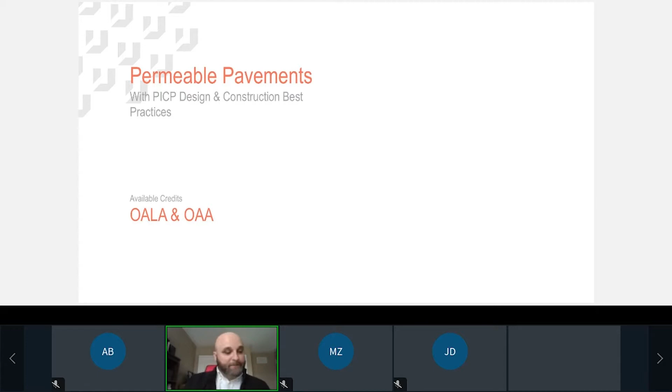So I'm going to begin with a brief history of Unilock, followed by the recorded segments with Alex. Unilock was founded by Ed Bryant 50 years ago, and the Bryant family are still the decision makers today. They continue to guide the company and make Unilock successful. 2022 marks a huge milestone for Unilock. It's our 50th anniversary. Unilock was the first manufacturer of concrete unit paving in North America.

We are a Canadian company with our first operation beginning in Barrie and have since expanded our operations to Ayr, Gormley, Pickering, and Georgetown locally. We also have US locations in Boston, Chicago, Cleveland, Detroit, Milwaukee, and New York, and we're growing.

We source local materials to manufacture our products, helping the communities that we operate in. We manufacture quality products by producing unit paving and wall blocks with precise dimensional tolerances, low absorption rates, and high compressive strength. All of our products meet but more often exceed industry standards.

Unilock is a trendsetter and drives the unit paving and retaining wall industry with new and innovative products.

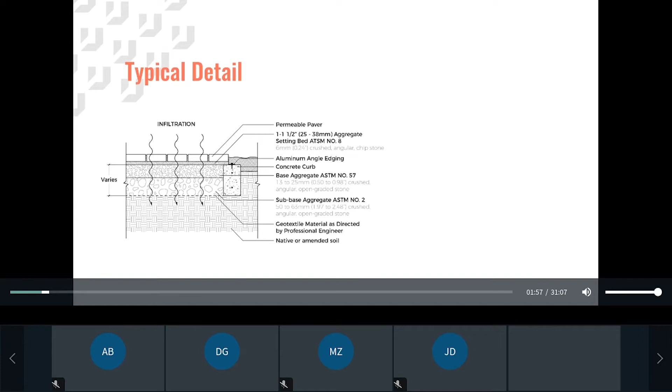In the 80s, Europe faced a series of devastating floods. The increase in sealed surfaces, in particular pavements, were found the largest contributors, triggering changes in stormwater management. Langsdorff Licensing saw a need and created the first permeable interlocking concrete paver, which allows rainwater to infiltrate through the pavement and back into the soil.

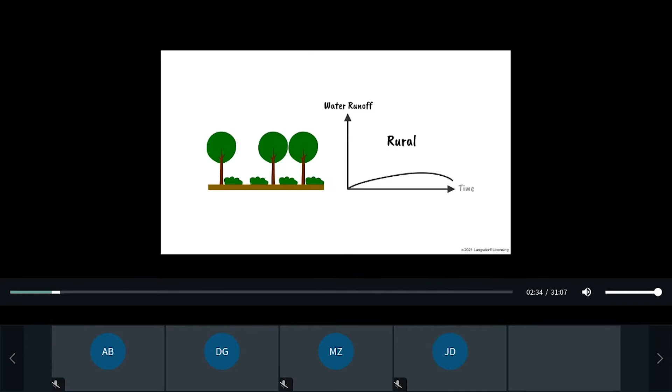Due to intensifying urbanization, water runoff is increasing and happening faster, causing more severe flooding.

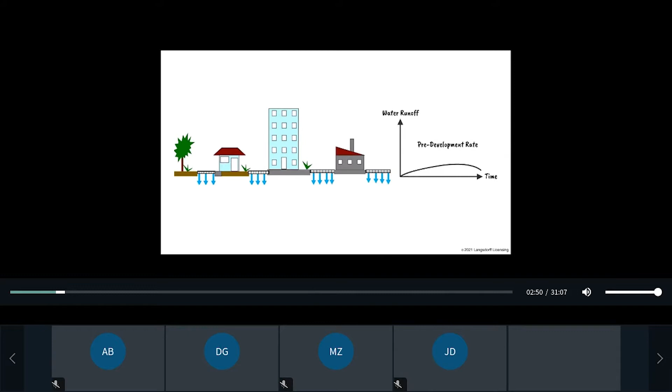Permeable interlocking concrete pavements, or PICP, help reduce runoff back to pre-development rates. After Germany, PICP systems were introduced, often mandated, in Switzerland, Austria, the rest of Europe, the UK, and all the way to Australia and Japan. The concept of utilizing permeable pavements became recognized globally. While there was early success in North America, the market here demanded more research.

Starting in the mid-90s, Drs. Ray and Miriam Rollings, Corps of Engineers, Professor Phelan, Northeastern University, Professor Zollinger, Texas A&M, Professor Shackel, University of New South Wales, Professor Hunt, NC State University, Dr. Drake, University of Toronto, and in particular, Professor James, University of Guelph, found that while offering numerous benefits, maintenance of PICPs can present challenges, especially when cleaning is delayed. Lack of cost-effective and practical approaches prevent the widespread adoption of PICP systems in North America. Novel and practical maintenance and operational methods supported by scientifically based proof are needed.

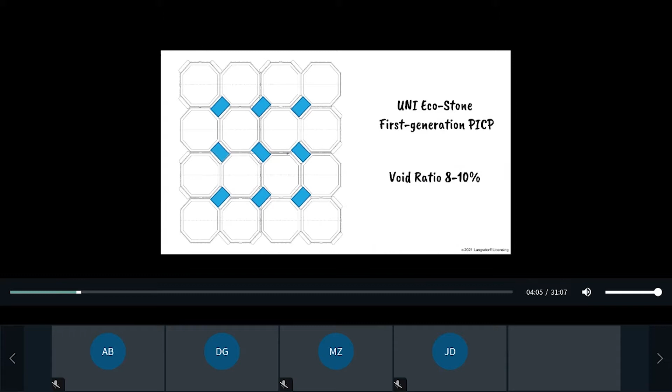The first generation permeable interlocking concrete paving stone had a void ratio of 8 to 10%. The second generation permeable interlocking concrete paving stones have a void ratio of 6 to 8%. However, clogging and maintenance are now the key concern. The drainage joints have now narrow walls, top to bottom, and over time, the top 1 inch gets obstructed with fine sediment.

The Kortright Centre permeable pavement test demonstrated that most cleaning methods show limited effect or are time-consuming and expensive. Our new product idea was to address this by changing the paving stone and its joint design. Our next generation pavers and joints are now formed so they can be easily cleaned. Please follow the link to see the simple yet effective solution to the maintenance problem.

Section 2. Case Study. Guaranteed Rate Field. Construction of the Guaranteed Rate Field parking lot was very expensive due to the required stormwater infrastructure. Alternatives to standard stormwater construction practices were being assessed, and 2 designs were developed, one using a standard stormwater infrastructure and one using permeable pavement.

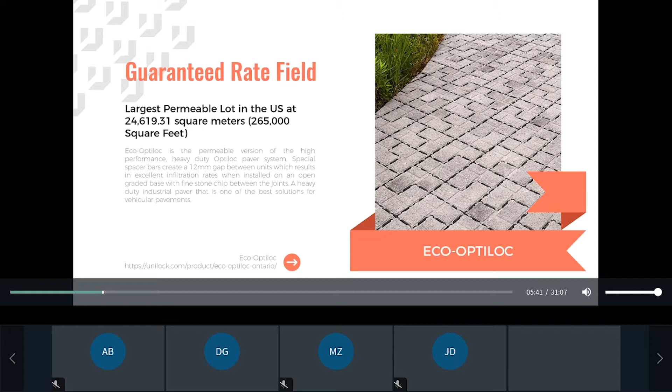Storage capacity is an important feature of permeable unit paving, and storage should be designed to accommodate an extreme rain event. For Guaranteed Rate Field, an additional 50,567 cubic feet of storage capacity was designed into the system to accommodate a larger rain event. The capacity is related to the depth of the subbase material, which in this situation was 14 inches of base aggregate with 40% void space, supplying 123,667 cubic feet of storage. For typical events, only 73,100 cubic feet of storage is used, but the system is made to accommodate an inevitable larger rain event.

The existing soil conditions on site allowed for up to 14 inches per hour of infiltration, so the parking lot did not need to be connected to the municipal stormwater services. Site soils are an important part of the success of a permeable pavement, so geotechnical engineers should be involved with the design of permeable unit paving systems.

By implementing a permeable unit paving system, no extra infrastructure in the form of 44 inlets, over 3,000 linear feet of pipe, and a storage tank was necessary. Also, by exchanging a traditional stormwater system with a permeable unit paving system, there is an approximate savings of $2 million in underground infrastructure. The resulting permeable unit paving installation had no inlets, no concrete pipe, or storage tank, which led to an approximate cost savings of 15% versus traditional rainwater mitigation methods.

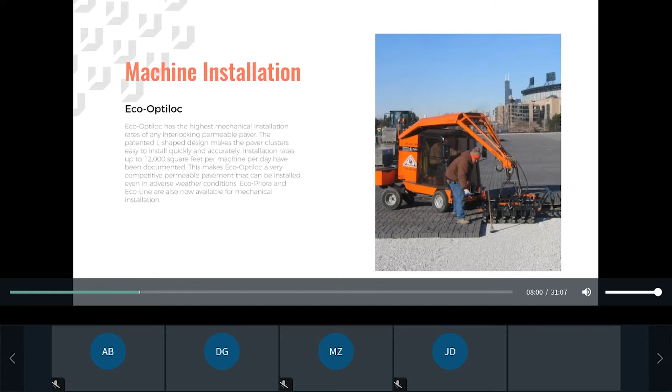Section 3, Case Study, Buckingham Fountain. Buckingham Fountain was completed in 2009 and was paved with our Eco-Priora permeable paver with a series finish. The significance of this project is the desire to maintain the appearance of the existing pavement material, but it was failing and needed to be replaced. There was also a need for permeable pavers to improve the drainage on site.

We were able to apply our series finish to our permeable unit pavers to closely match the existing color and overall appearance of the plaza space.

The same natural stone material used to create the original pavement was applied to the face of our pavers in the form of an aggregate, which we refer to as series. The site receives constant foot traffic and is often used for filming, but it maintains its look and feel. Buckingham Fountain is the largest permeable unit paving plaza in the US, and it gave rise to a series finish that has now been used on a variety of projects since.

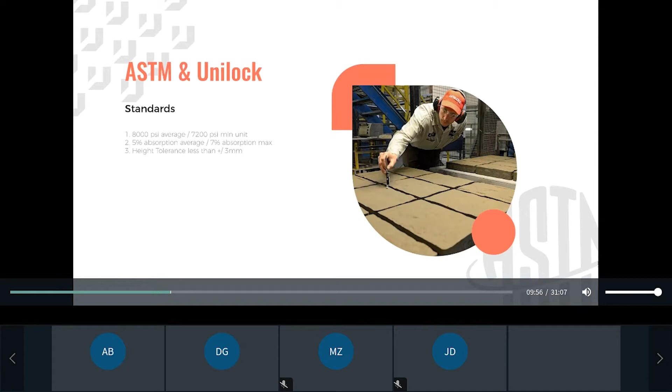Section 5, Benefits: Infiltration and Pollutants.

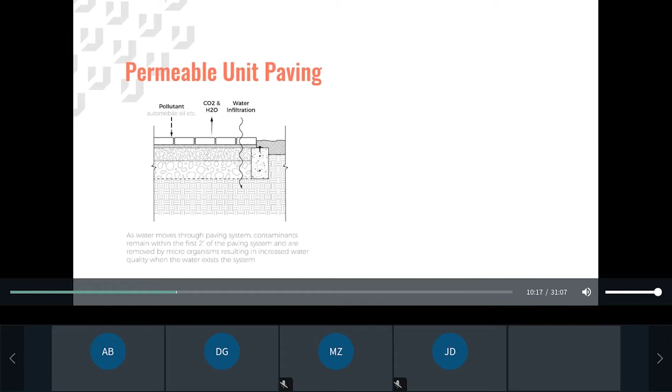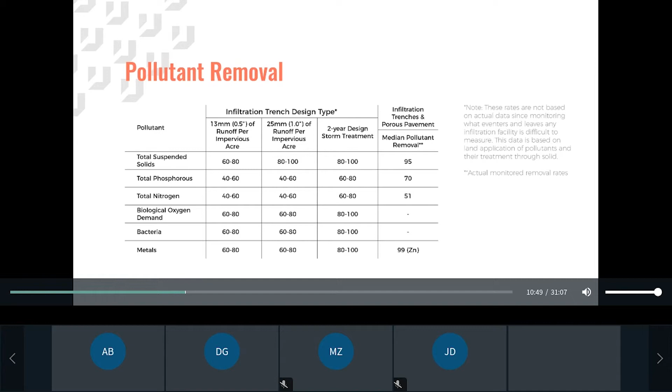Overall, permeable unit paving systems do well at removing suspended solids and phosphorus, which can cause eutrophication when leaching into natural water sources. Eutrophication is common in agricultural areas, where it creates dead zones and can be responsible for algae blooms.

Section 6, Design: Materials and Laying Patterns.

Before selecting a type of permeable unit paving, it is important to determine what you are trying to achieve. Consider what the goals of the project are. Does the site receive vehicular traffic, or is it a streetscape where wayfinding is important?

Are there environmental factors that need to be taken into consideration? Is downstream erosion an issue, and what type of rain events will the pavement need to accommodate? What local regulatory requirements exist? For example, the Toronto Green Standard requires a solar reflective index of 29 or greater. Determine the site soils, as they will influence the base depth of the system, and if water needs to be redirected to areas with higher infiltration rates. Lastly, what is the budget for the project? This can determine what finishes are available and whether immediate costs outweigh life cycle costs.

Loading conditions are very important when designing a pavement, and the vast majority of the time they can be accommodated if considered during the design phase, ideally during detailed design. When the pavement receives a load, the base and sub-base components of the unit paving system carry the majority of the load. They must maintain strength in the presence of water for pavement stability.

Aspect ratio is a relationship between the thickness of the unit paver versus its longest side. For example, our Promenade Plank paver is 100 by 300 by 100, having a thickness of 100 millimeters and a length of 300, conforming to a 3:1 aspect ratio.

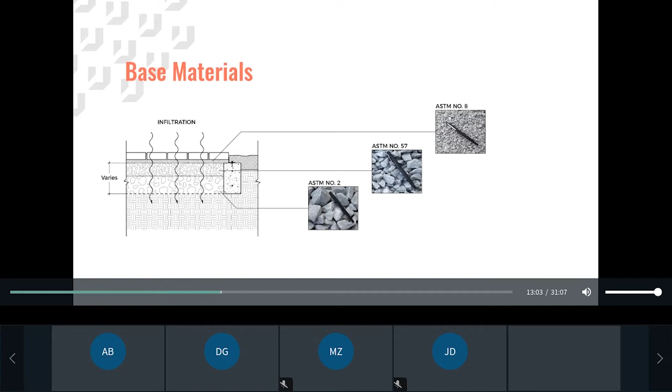These images illustrate the different sizes of various aggregates used in the construction of permeable unit paving. Take notice that these materials are all washed stone, free of fines. These tables speak to the different types of aggregates used to build a permeable unit paving system. Careful selection of base materials ensures that an installation can handle almost any amount of rainfall.

Installing a permeable paver system above porous soils allows for rainfall infiltration, reducing runoff and flooding. Most soils, even clay, allow for some infiltration. Soils with high porosity, such as sand, can have a higher infiltration rate than the actual rate of rainfall. For example, if it is raining at a rate of 2 inches (51 millimeters) per hour and the soil has an infiltration rate of 4.5 inches (114 millimeters) per hour, the soil will absorb water before it can run off.

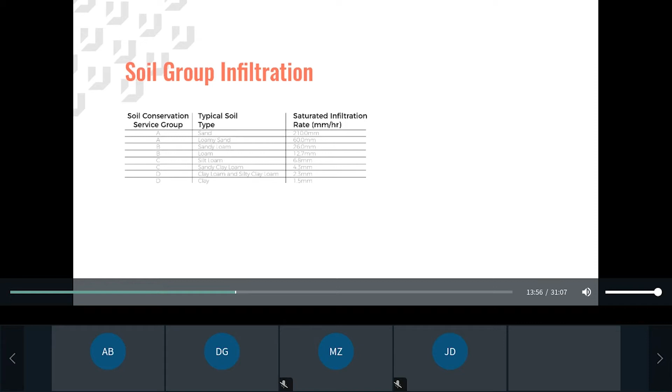Even poor soil with a low infiltration rate will work. For example, a soil with 0.25 inches or 6 millimeters per hour of infiltration will have complete infiltration after 4 hours of rainfall. Permeable paving is not a typical segmental pavement.

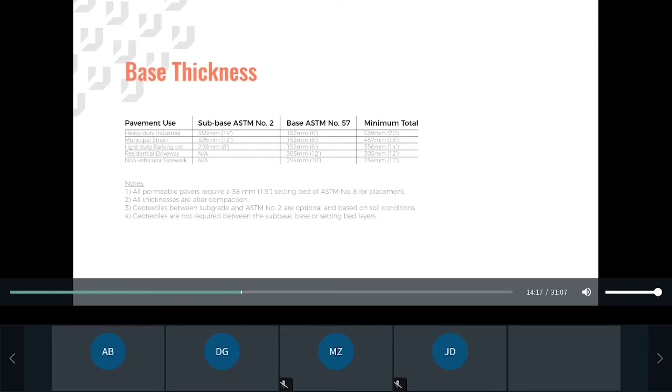Unilock recommends that a professional engineer design a site-specific plan based on available site information. Along with information provided in this presentation, Unilock offers all the data on our pavers necessary for a successful design and implementation of a permeable unit paving system.

Section 7. Maintenance, Inspection, and Practices.

Before providing maintenance on permeable paver systems, proper installation and protection during construction is required. The following are some things to keep in mind during construction: verify the correct materials are installed, hire contractors with experience installing permeable pavers, and review and approve all subbase, base, and joint aggregate materials. Do not allow installation of dense graded aggregates.

Prevent construction damage. Restrict vehicles with muddy tires from driving over newly paved surfaces. Do not mix aggregate materials. Refill joint material once between 3 and 6 months after installation, repeat as needed approximately every 5 to 10 years. Lastly, avoid stockpiling of materials on or near the permeable pavements, such as topsoil and mulch.

There are several warning signs and visual clues of common maintenance issues that must be prevented and addressed or remediated to ensure continued surface infiltration. These common problems can often be easily remedied by maintaining the proper joint aggregate level.

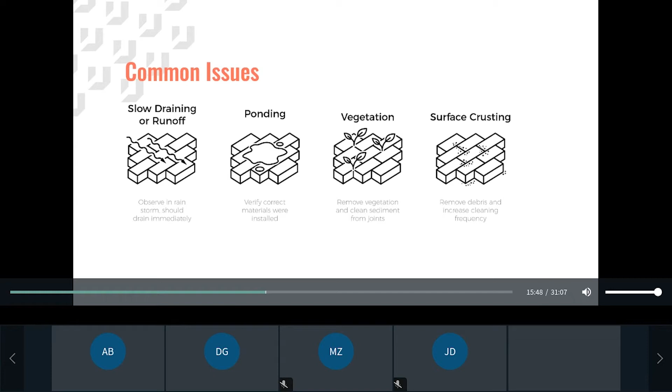Regular surface cleaning significantly reduces the chance of a system clogging, which means other more intensive treatments will likely not be required. This type of cleaning would be considered preventative, but in the event regular maintenance has not been taken, restorative measures can be taken. These include power washing or lifting the pavers to remove their jointing aggregate.

For more information on maintenance related to clogging prevention and removal, Unilock has a permeable unit paving maintenance guide.

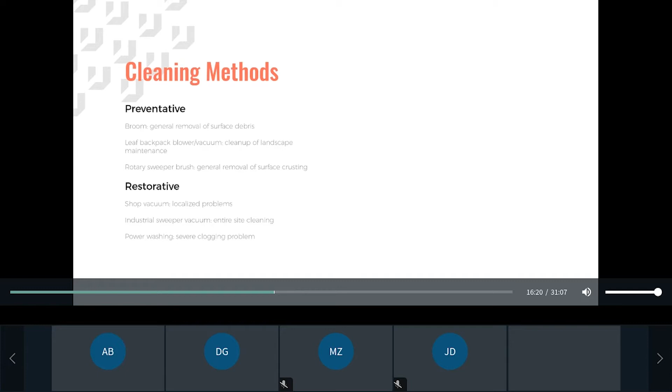Use sodium chloride for temperatures as low as 20 degrees Fahrenheit or -7 degrees Celsius. Calcium chloride should only be used when necessary, when temperatures are below 20 degrees Fahrenheit or -7 degrees Celsius. Follow the directions listed on the de-icing product bag, but use them sparingly. Only apply the minimum amount necessary to melt the snow and ice. Over-applying the product can result in damage to the unit pavers.

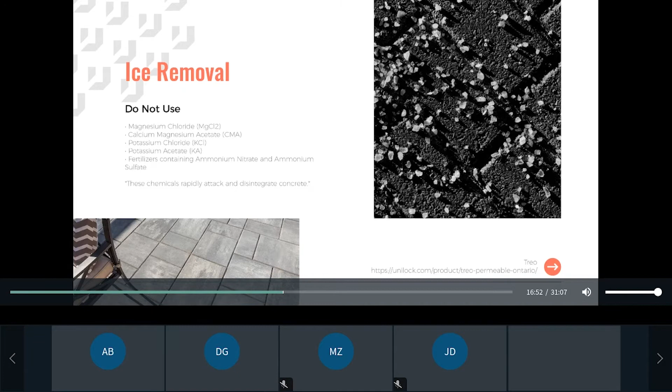Sweep and remove any excess de-icing chemical after the ice and snow melts. After the winter season, thoroughly wash the surface of the pavement to remove any remaining excess de-icing chemicals.

When using plowing equipment, it is important that they are equipped with plow scrapers and blades made of high-density plastic to reduce the risk of damaging paver joints and the surface of the pavement. While scraping the surface without this protection will not compromise the structural integrity of Unilock pavers, it may affect the aesthetic of the surface by leaving behind rust marks and further damaging the finish. In contrast, a rotational snow broom can be used to remove snow safely from the paver surface.

Unilock suggests establishing a best practice maintenance program to ensure longevity of the system before restorative action is required. I will briefly take you through a maintenance program.

After the snow melts, March 1st to April 15th, begin using a broom, blowing equipment, or a rotary brush to clean the surface of the unit paving. Give special attention to areas used to stockpile snow. Once this is complete, replenish the joint aggregate. Every 5th year, vacuum or power wash problem areas and refill the joint material.

Late spring, April 1st to May 15th: again, use a broom, blowing equipment, or a rotary brush to remove organic material from trees and shrubs. Collect any additional debris, especially from areas that have been mulched or planted with annual flowers. Replenish the jointing aggregate material as necessary.

Late fall, October 15th to November 30th, once again clean the pavement using the same methods and replenish the joint aggregate material as necessary. Note that various factors will affect each project's preventative maintenance timeline, so they must be individually reviewed. I will now play you a short video on Duraflow with Rapid Clean technology as it relates to maintenance.

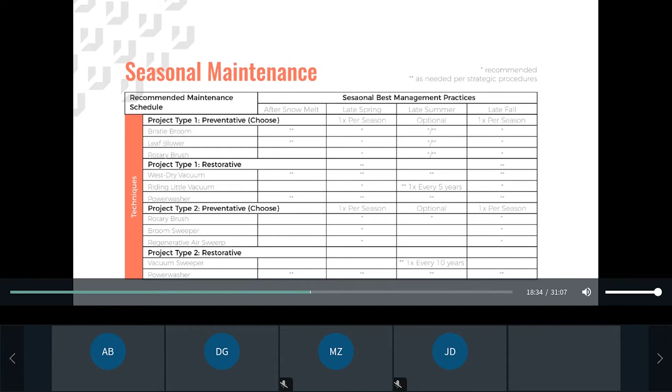Permeable interlocking concrete pavements with Rapid Clean technology, Part 2.

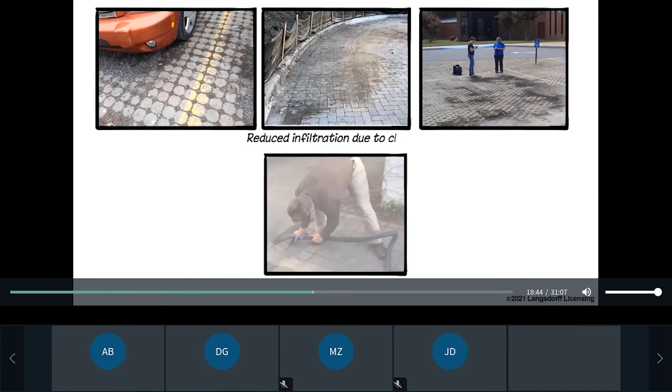Previous research and 20 years of experience taught us that the current generation of permeable interlocking concrete pavers can have some maintenance issues, see our Part 1. If not cleaned regularly and diligently, over time the infiltration rate of a permeable pavement diminishes significantly. Most standard cleaning methods show limited effect.

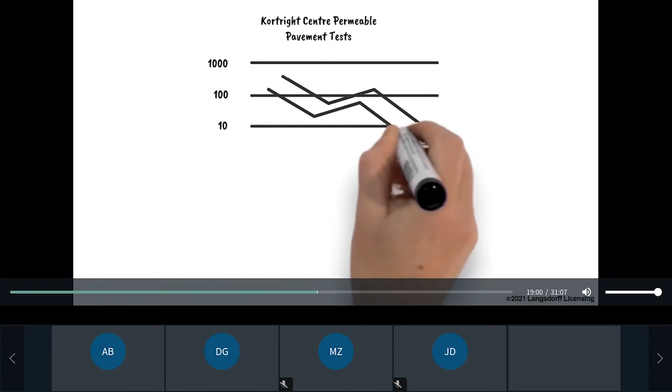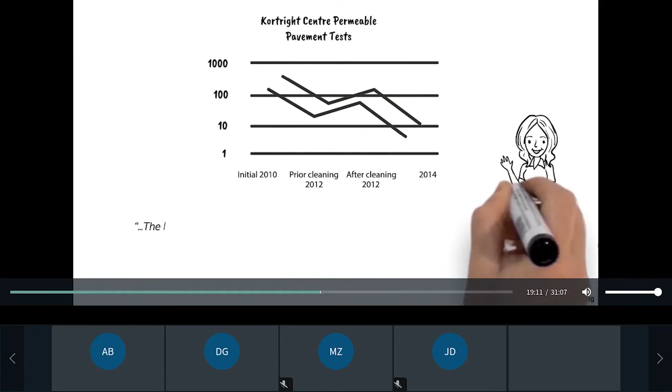The reason lies in the design of the current generation of PICPs. To quote Jennifer Drake, a researcher from the University of Toronto, the lack of proven cost-effective and practical approaches for permeability restoration prevents the widespread adoption of PICP systems in North America. Novel and practical maintenance and operational methods supported by scientifically based proof of effectiveness are needed.

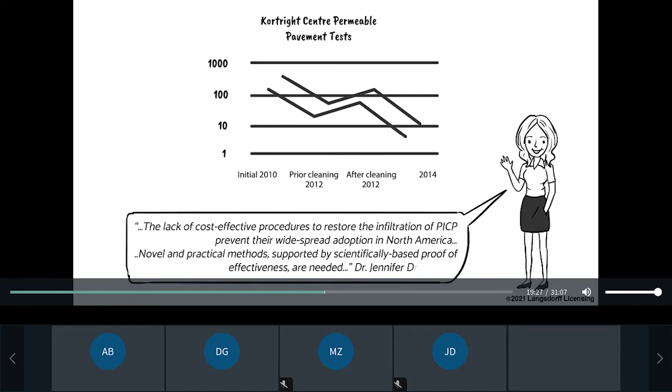Rather than enforcing unrealistically strict maintenance schedules and expensive special equipment to maintain current PICPs, we developed a new system by redesigning the paving stone shape and joints, specifically with maintenance in mind. The key performance objectives during development of our Rapid Clean technology were: intended for all traffic loads, offer infiltration rates of at least 10 inches per hour equal to the original stone, be fully ADA compliant with less than half-inch joint width, and successfully pass the most rigorous cleaning trials.

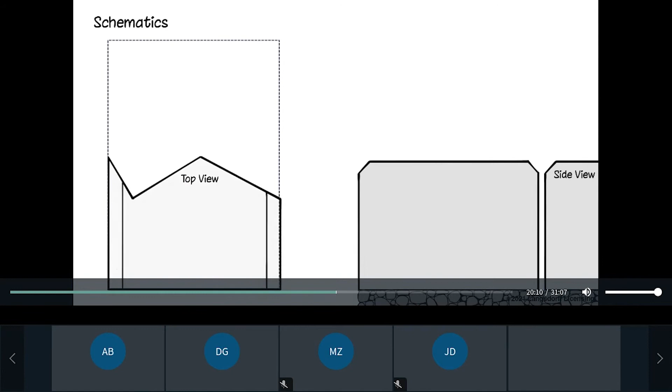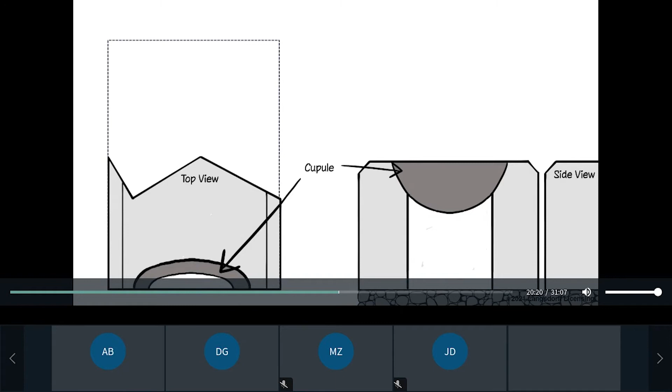Here are the schematics of the design approach. Take a typical concrete paving stone, shown here in top and side view, and incorporate channels or conduits along the sides. Create special concave openings along the top of the paving stone, called cupules. Here is one of them. Fill the conduit and cupule with drainage aggregate.

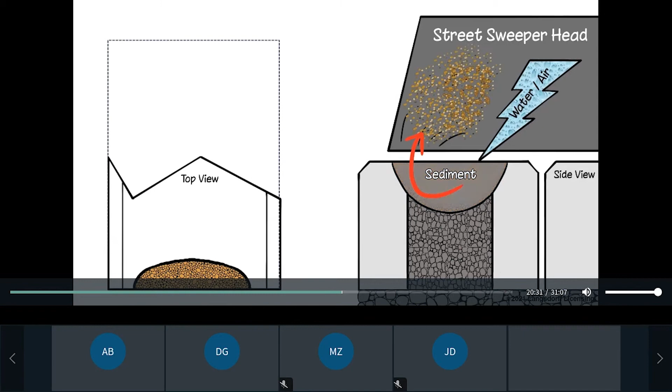Now pressurized air or water is able to rapidly dislodge sediment and debris and facilitate easy cleaning of these cupules. Also, brushes and bristles can now dislodge debris rapidly. So what is a cupule? Cupules are concave natural or man-made depressions on the surface of rock or stone.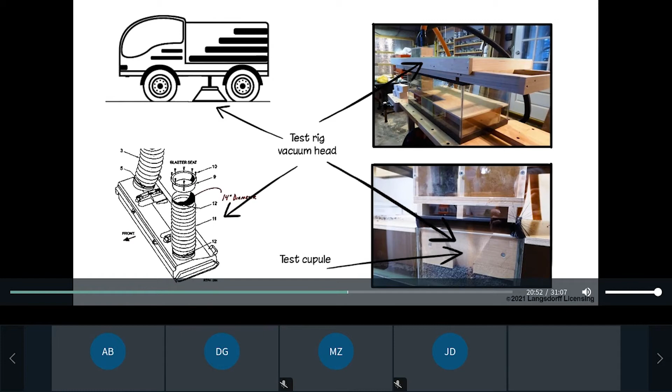A test rig was constructed and set up at the University of Guelph laboratory to model the vacuum head of a typical regenerative air street sweeper. So much for the theory, now the test trials.

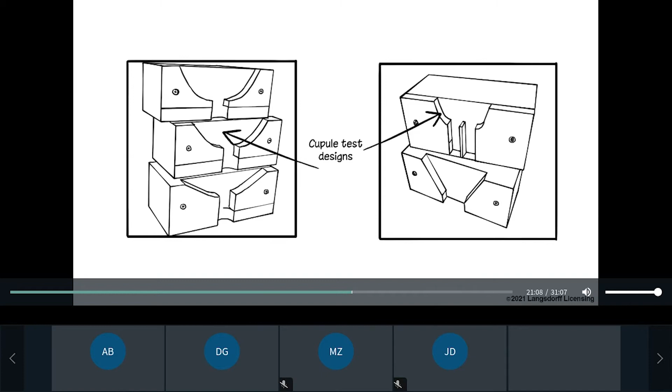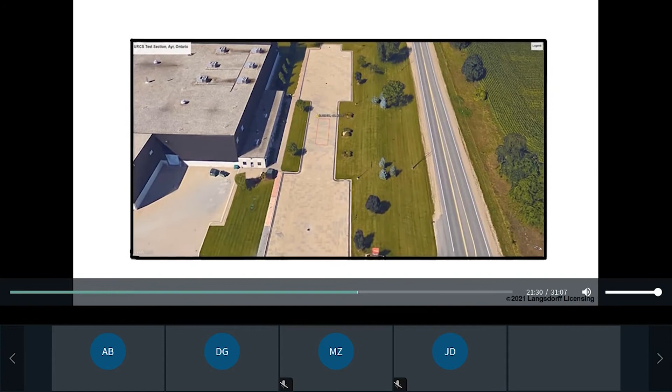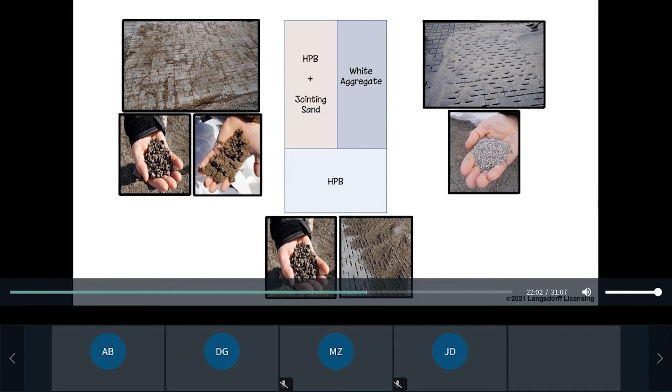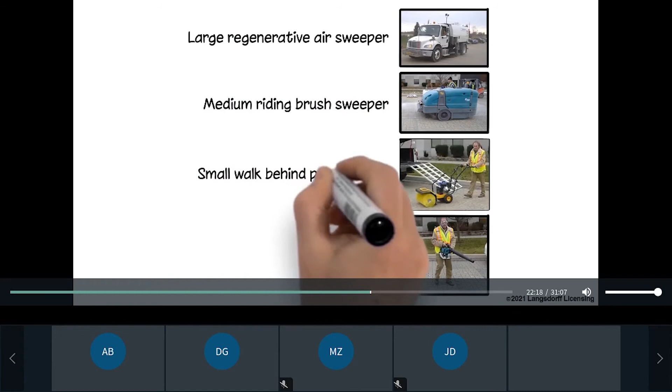Then the new Rapid Clean pavers were installed. Next, the cupules and joints were filled with drainage aggregates in various gradations. Here, a close-up of empty and filled cupules and joints. Now the full-scale cleaning test started, using a large regenerative air sweeper, a mid-size riding brush sweeper, a small walk-behind power brush, and a portable handheld blower.

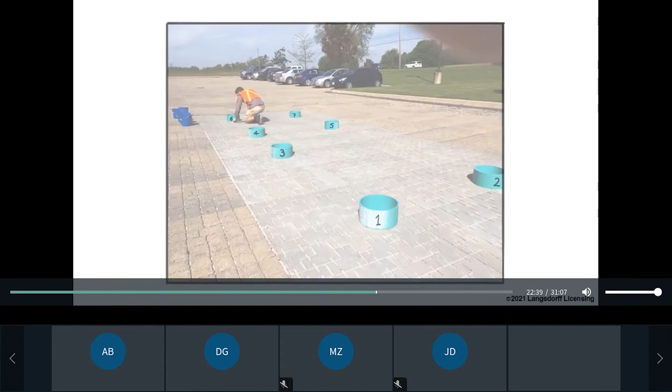Visible here is the removal of sediment from within the cupules. Further infiltration tests after 3, 6, 9, 18, and 24 months were conducted. These tests demonstrated that after each cleaning, even when only using medium and small motorized brushes, the infiltration rates could rapidly be regenerated to the initial levels of between 100 and 500 inches per hour. Of note, the industry recommended long-term infiltration rate is to be above 10 inches per hour.

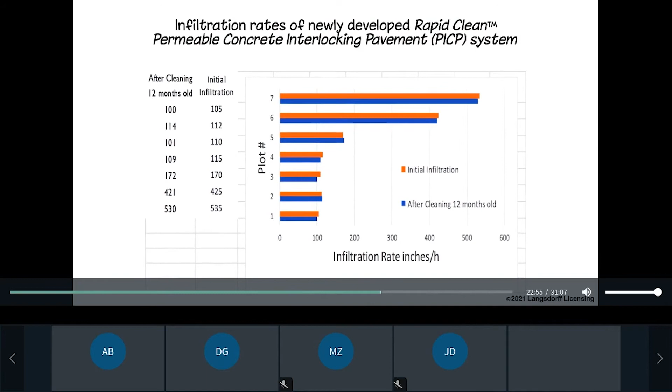Test results were published in several peer-reviewed research reports, journals, and at the Stormwater Conference. Links can be found on our website.

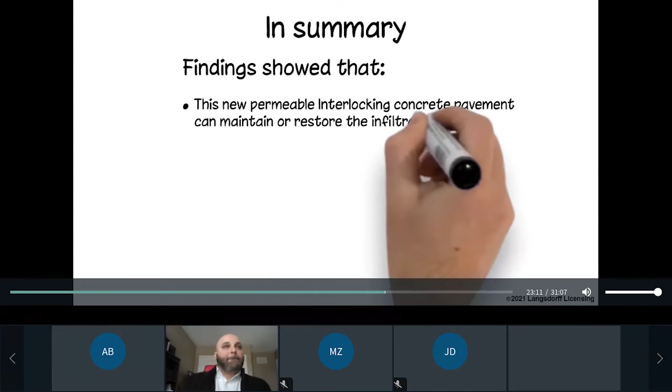In summary, findings showed that this new permeable interlocking concrete pavement can maintain or restore the infiltration rate rapidly using readily available maintenance equipment, even simple handheld tools. The cleaning speed goes up and the maintenance cost goes down. Moreover, cleaning intervals could be extended as cleaning becomes simpler, even when clogged.

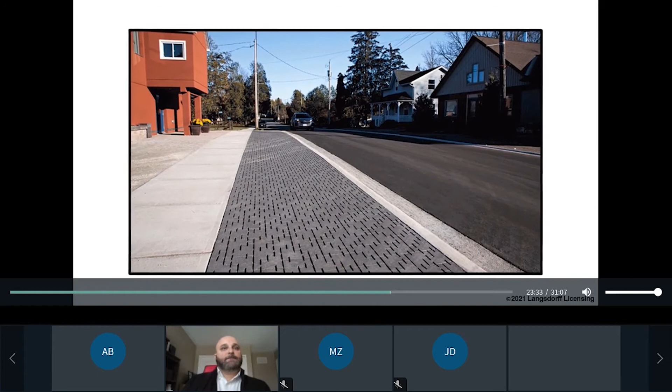While all PICPs are intrinsically beneficial, this new Rapid Clean permeable pavement system gives added confidence that even neglected or delayed maintenance can now be performed easily when required or mandated. Besides the acknowledged benefits of PICPs, such as better aesthetics, high traffic loading, easy access of underground utilities, and low life cycle cost, these major savings in maintenance costs for municipalities and facility owners will provide new opportunities for the use of permeable interlocking concrete pavements.

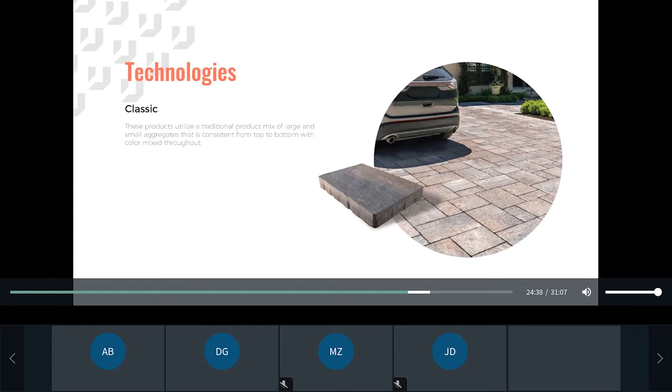Enduracolor utilizes the same durable concrete as the classic finish, but is then topped with a face mix to provide a range of textures, colors, and lasting color. The top of the paver also has a finer finish, so larger pieces of aggregate are not visible.

Our Elegance line is made using wet cast concrete, whereas other products use a dry casting method. By wet casting the pavers, we are able to offer seamless textures and colors, as well as form finer features into the pavers. Additionally, our wet cast concrete unit pavers have a higher compressive strength to form an even longer lasting pavement.

Our Eco Optilock has been used for years due to its durability and adaptability to any situation. It's made with our classic dry casting manufacturing method and is formed in an L shape for increased lockup. Because of these characteristics, it is economical and can withstand heavy vehicular loading without movement or cracking.

Duraflow is a permeable pavement specially designed with rapid clean technology. Cleaning in the correct direction allows for easy extraction and replacement of jointing aggregate.

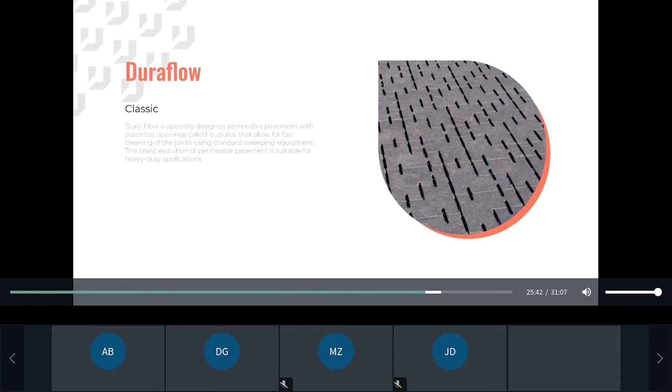Smooth is new and provides designers with a permeable paver option that can be installed in a random pattern. It also has a smooth, modern aesthetic.

With the success of our Promenade plank paver line, we introduced Eco Promenade to supply the design community with a plank-style permeable option. This product is available in a face mix and can be used in heavy vehicular situations.

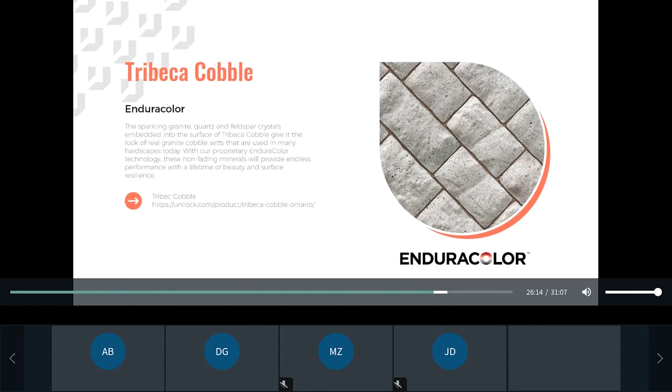LEED, Leadership in Energy and Environmental Design, is a green building certification program that recognizes best-in-class building strategies and practices that have a positive impact on the health of occupants while promoting renewable clean energy. To receive LEED certification, building projects satisfy prerequisites and earn points to achieve different levels of certification. Unilock products can help with their certification goals.

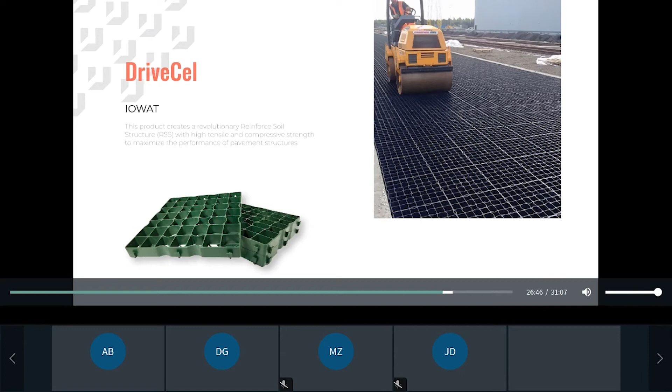DriveCel is a reinforced soil structure product that enhances the performance of pavement structures. I will now play a short video from IOWAT to further explain how it functions.

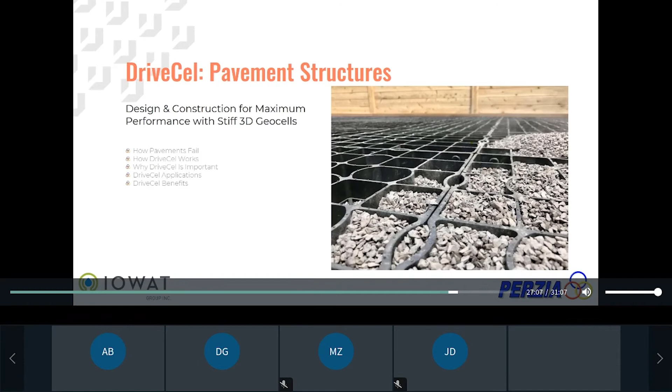The addition of DriveCel within pavement structures maximizes the strength, stiffness, and resilience. To help understand this, we will discuss how pavements fail, how DriveCel works to prevent failures, why this is important, where we can use DriveCel, and the benefits that DriveCel provides.

Pavement structures are strong in compression but weak in tension. They can fail in different locations, from different causes and mechanisms, but ultimately they fail in tension.

DriveCel stiff geocells strengthen pavement structures by combining the best of both worlds from geogrids and flexible geocells, by reinforcing and confining. This results in maximum strength, stiffness, and, most importantly, resilience for flexible pavement structures.

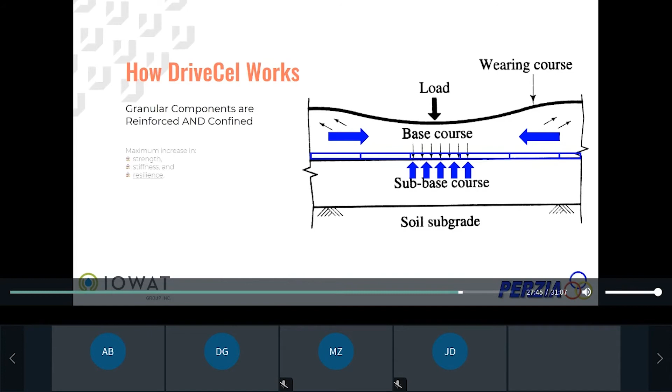DriveCel can be used in the base layer on decent subgrades and directly on weaker subgrades, like a snowshoe, to reduce the pressure on the subgrade.

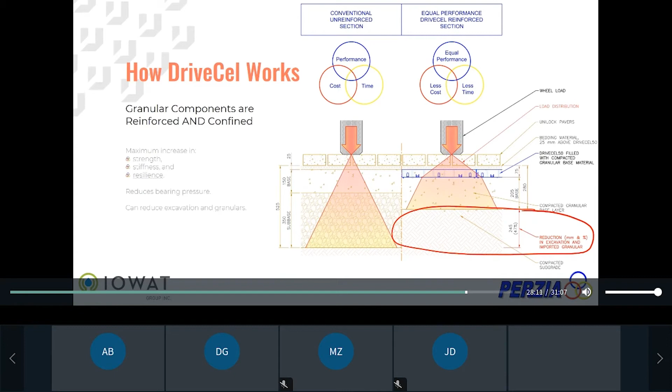DriveCel can be added into conventional unreinforced pavement structures to significantly increase their strength and performance. Or you can take advantage of the strength increase by reducing the thickness, to reduce the excavation and granulars, while maintaining a similar or greater strength when compared to the original unreinforced section.

Here is a comparison of the wheel load distribution for a flexible versus rigid pavement.

In a flexible pavement, DriveCel maximizes the stiffness to increase load distribution and maximizes resilience to increase durability. Together, these maximize the performance lifespan. Ultimately, this reduces maintenance costs and minimizes life cycle costs.

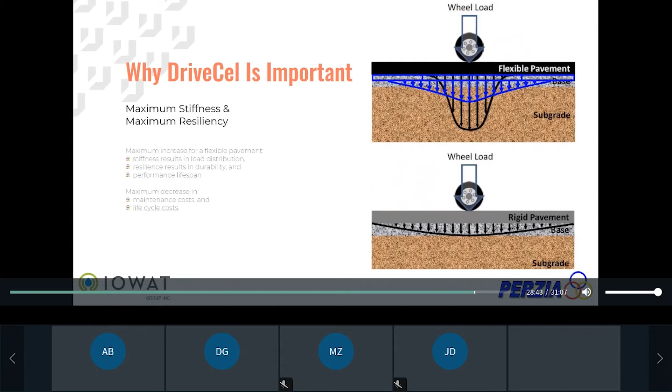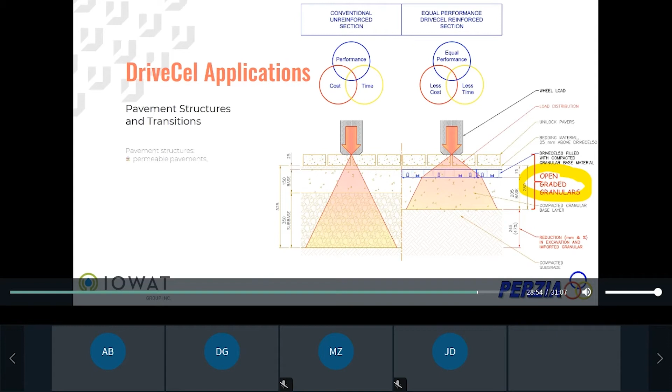For permeable pavement structures, the base and subbase are typically composed of open graded granulars. The design priorities are structural first, then drainage. A rigid and impermeable concrete base layer is a mistake under a flexible and permeable concrete paver's driving surface.

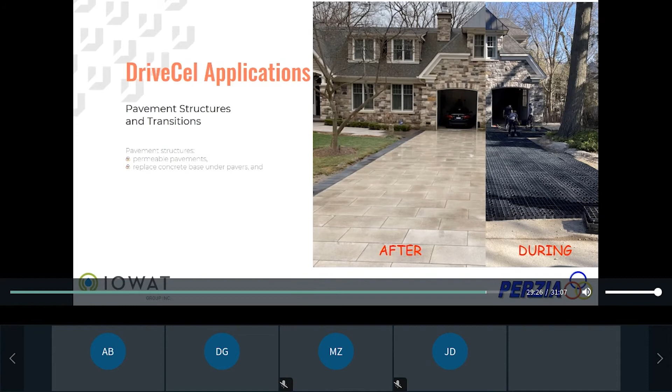The original concrete base for this driveway was replaced with DriveCel. DriveCel can be used on the roofs of parking garages to improve performance, especially at transitions, and to reduce the weight of the granulars.

Tension cracks typically form at transitions from one type of pavement to another. Installing 2 layers of DriveCel along the transition helps smooth the transition and prevent cracking.

Too often, pavements and curbs break up around catch basins. Installing DriveCel helps tie this area together to reduce costly repairs.

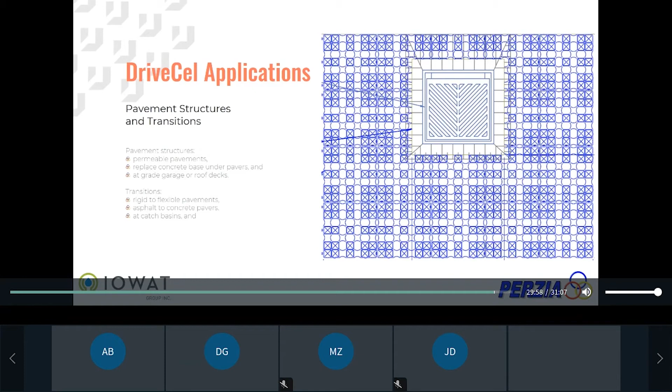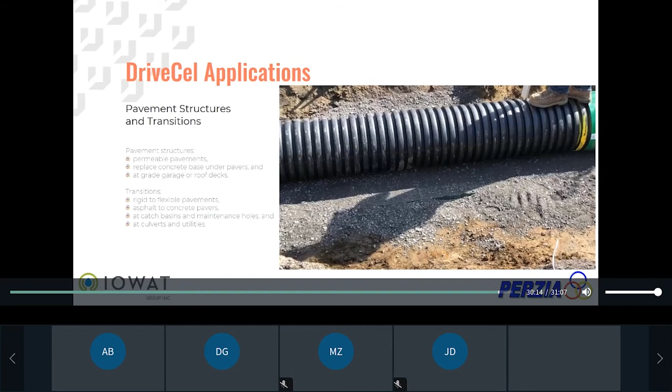Pavement structures often deform and crack over culverts. Installing DriveCel under the culvert helps spread the load and reduce the excavation required. Installing another layer above the culvert in the pavement structure helps prevent deformation and cracking.

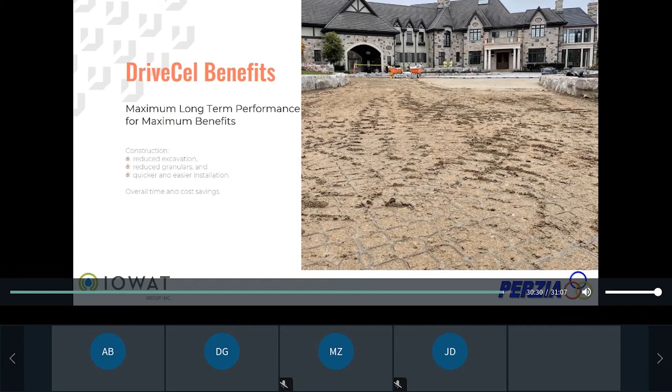DriveCel maximizes the long-term performance of pavement structures for maximum benefits. During construction, the excavation and granulars can be reduced. Plus, the installation is quicker and easier. This results in overall time and cost savings.

Maximizing the resiliency maximizes the durability. This means more wheel passes, less maintenance, and bridge transitions.

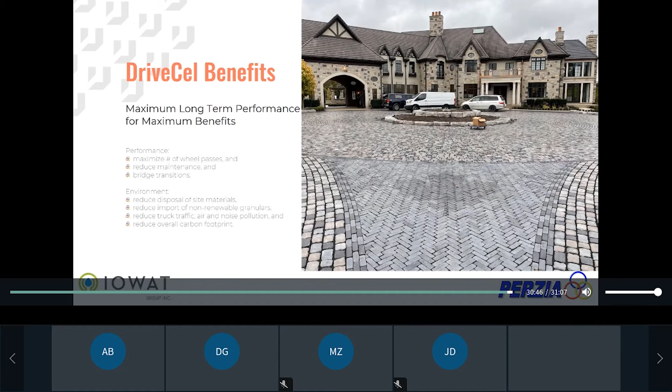Finally, using DriveCel has direct and indirect environmental benefits, including reducing export and imported materials, reducing truck traffic and related air and noise pollution, all while reducing the overall carbon footprint.

Thank you very much. That concludes today's pre-recorded presentation on permeable unit paving.

Perfect. Thanks, Alex. That was great content. Judging by the amount of questions, very hot topic - permeable paving is always for us. So we're going to take some of these questions and hold them till the conclusion of our presentation, that way we can try to answer as many as possible. Well, thank you for that.

Bear with me. Okay, so I think as you know, the reason I love doing these types of lunch and learns and education seminars is because LID broadly, of which permeable pavement is one, still suffers from low uptake from all stages, from developers and clients asking for it, or municipalities accepting these types of technologies.

And from what I've observed over my career is that this hesitance about using permeable paving and other LIDs comes from a number of sources. One is the experience of past failures and the fact that all of these technologies are still in their early generations and have changed drastically over the last 2 decades.

And we've seen examples of that just in here about the first and second and third sort of generation of paver designs. Permeable pavements and permeable pavers have changed drastically in terms of their designs, and so their performance has actually changed very significantly. And so they are much more cost effective and longer lasting than they were previously.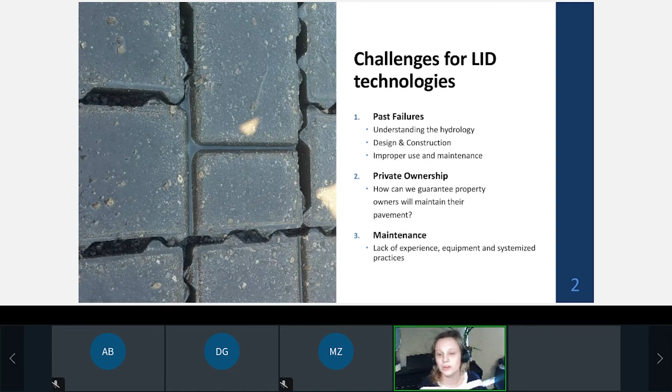Other issues in terms with this hesitance are how can we ensure private ownership, that they are going to be operated and maintained. And then when it comes to executing the maintenance itself, generally lack of experience or access to equipment or systemized practices, it continues to be a barrier.

As we've already seen too, cost is certainly a driving consideration, and recognizing and balancing the fact that permeable pavements are two things at once.

They are stormwater technology, but they're also a pavement system. And balancing that, a permeable paver may have a higher price ticket, but it's providing two functions. So trying to figure out how we square that is very difficult.

Public misconceptions, especially around winter, continue. And having data and information about how these systems will perform once they're built and in the ground, so that policymakers can update policy or set criteria, is a real need.

One of the most important functions of permeable pavements is their ability for quantity control. I have a very short snippet of a pervious concrete pavement—we look at all types of pavements, but just so we can see the real benefit these products have.

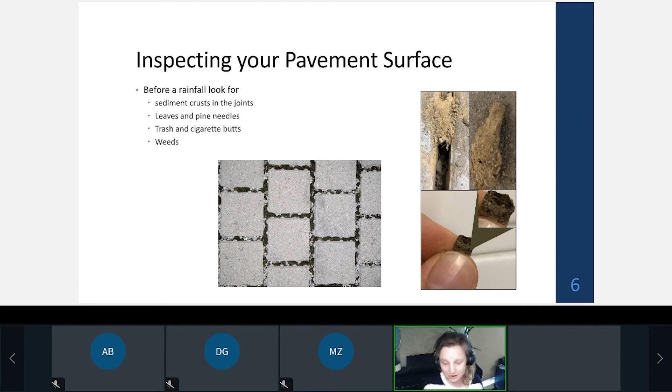And then, the presence of weeds—those plants only become established when there are sediments in the soil, because it's the sediments that hold the moisture the roots can access. When joints are sediment free, you don't see the same amount of vegetation because it's a very open and quite alkaline material environment, so it's not very hospitable for vegetation.

During and after a rainstorm, the question is really simple: do you see any water? If we see water accumulating on the surface of a permeable pavement and persisting, both during and after the rainstorm event, that is our indication that section of the pavement, or the pavement more broadly, requires some maintenance.

Another approach is to track performance over time by doing a systematic, repeatable test that measures infiltration. You saw examples of this single ring infiltration test in previous presentations. In these tests we're not replicating a rainfall event, but applying a known volume of water and timing how long it takes to infiltrate. That measurement, if repeated once a year, can be used to track the pavement over time and plan for restorative or preventative maintenance as appropriate.

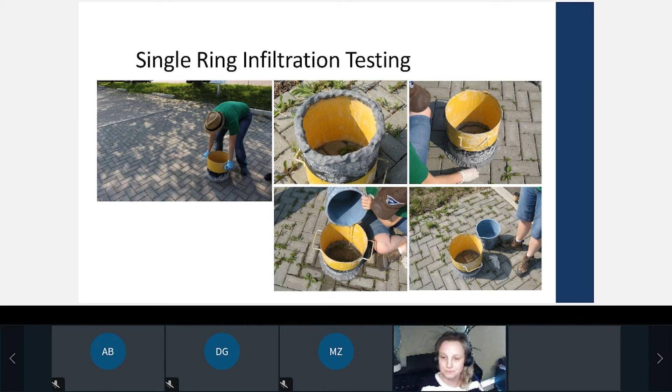Let me share some recent research work from my group. I'm very interested in maintenance, and one of the challenges is that every parking lot, laneway, or walkway is unique. So it becomes very challenging to produce the scientifically sound evidence about how different technologies are going to restore surface permeability.

So with partners in this project, we constructed a generic permeable pavement pad and systematically clogged it. Using street sweeping material from City of Toronto municipal lots, we measured site-specific amounts and applied them directly on the joints, wetting them so they wouldn't blow away. This allowed us to uniformly clog the surface and directly compare different common cleaning equipment that municipalities or property owners might have available when restoring surface permeability.

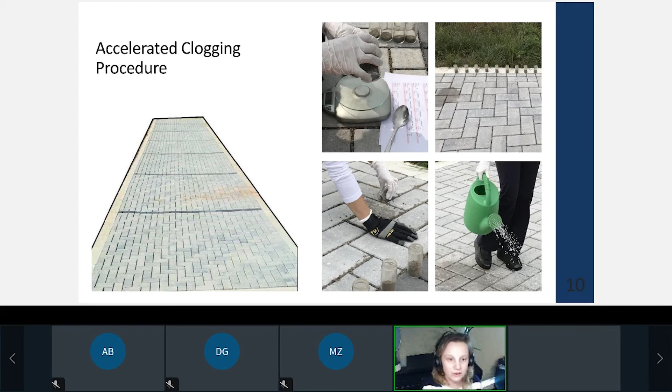You can see in the photo here the permeable pad prior to clogging, and then what it looks like afterwards. In the photo on the side, you can see the difference in color between the clogged section and the unclogged cell we kept for comparison at the back.

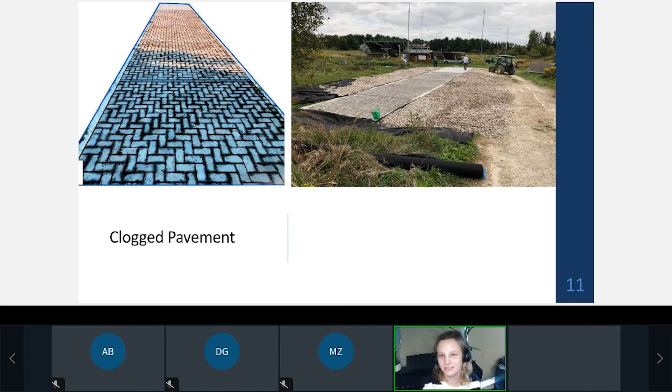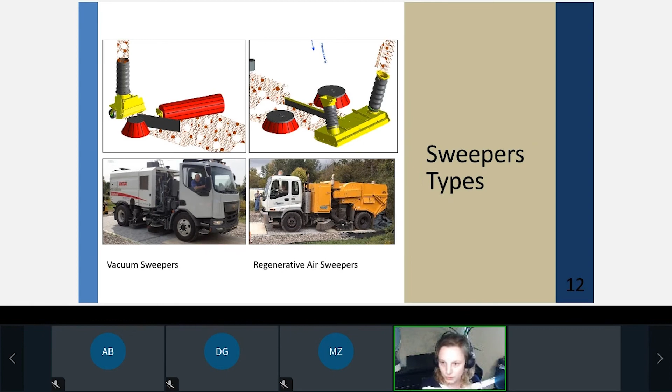We used this pad to test different types of street sweepers and other cleaning practices one might use for permeable pavement. This included true vacuum sweepers, regenerative air sweepers, waterless mechanical sweepers, power washing followed by manual vacuuming, and specialized equipment intended for PICP restoration, which was a two-part process of pressurized air followed by high-suction, high-strength vacuuming.

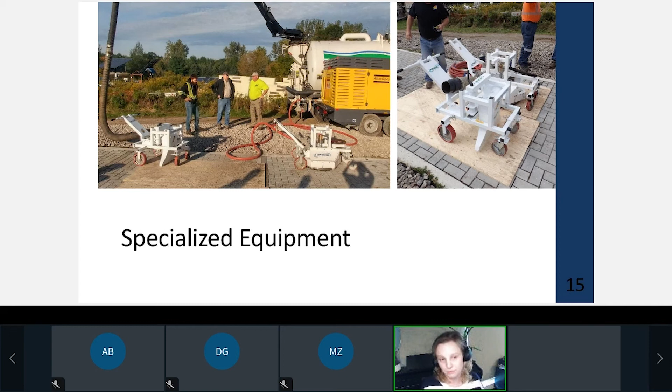So I've got a little snippet of just the...

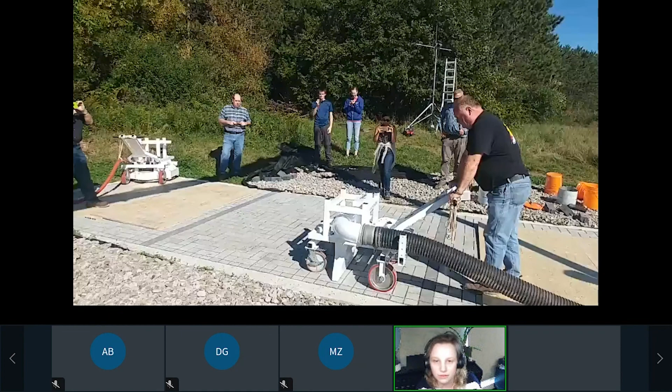So what did we see? What were the findings? Well, the good news is that we were able to demonstrate, in this controlled setting, the advantages and limitations of these different technologies. All of the tested treatments provided some restoration. This study was limited in that we only allowed each technology a single pass over the pavement; they weren't allowed to go more than once.

And what we can see is that vacuum sweepers, and the pressurized air vacuum system, provided the highest restoration of surface permeability.

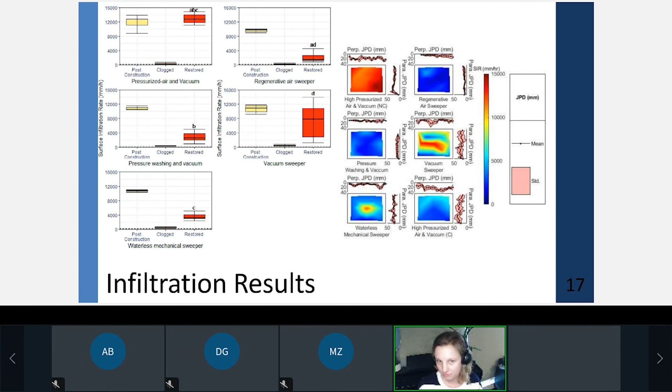We also observed, although I don't show it here, that the orientation of the joints definitely affects how much water or material is going to be removed. Joints in line with the path of the vehicle will have more material removed than those perpendicular. So especially with maintenance sweeper trucks, cleaning with a hatched pattern will ensure more uniform coverage, and thus higher restoration across the surface.

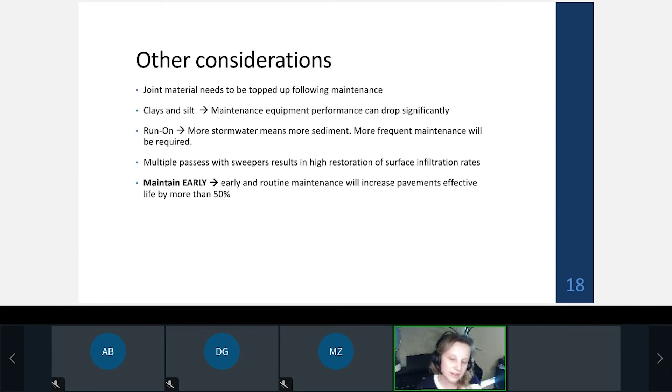Other considerations we've looked at, but don't have time to discuss, include the impact of clays and silts. We were testing regular street sweepings as our clogging material, but if you have a site exposed to clays or silts, or that's the soil in the area, maintenance equipment performance will drop significantly. Similarly, others have shown that pavements receiving run-on, additional stormwater inputs, receive higher sediment loads, so maintenance will either be more difficult or required more frequently.

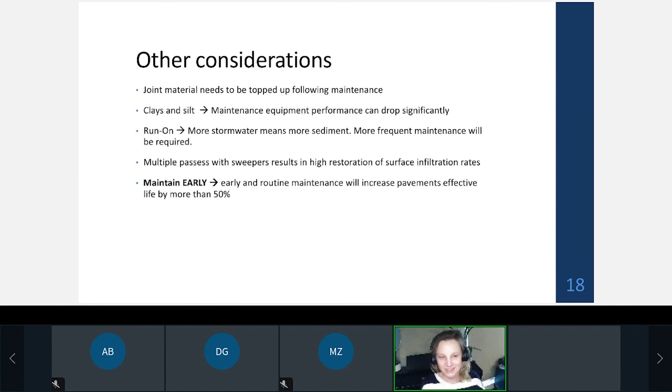Multiple passes on sweepers will result in higher and more uniform restoration of infiltration rates. Lastly, the most important thing is maintain early. The maintenance I've talked about here is restorative work, when the pavement's been left and neglected and we're trying to bring it back. This is much simpler if it's rolled into an annual maintenance practice. So the take-home message I'd like to leave you with is maintain early and save yourself a lot of effort. This work has received funding from NSERC and ICPI, as well as many other partners.